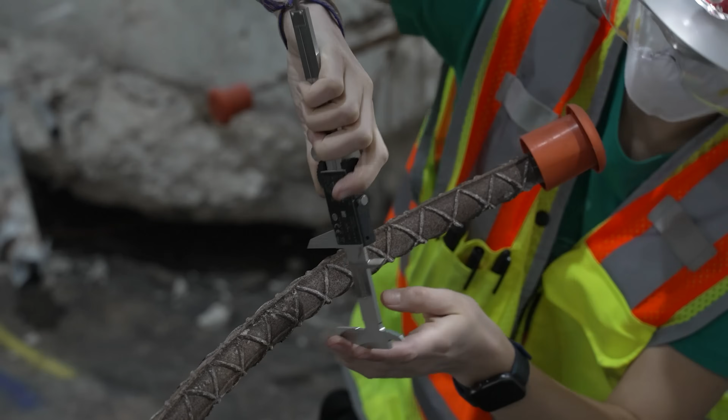My name is Emel Ganapati. I'm an associate professor at the Department of Public Policy and Administration at Florida International University. I will be leading the social science team as part of the investigation. Social science research is going to support the technical investigation, what our engineers and forensic scientists are doing. It's also going to help us understand the context — what happened, what time it happened, who was there, how things changed from the plans — because we're trying to solve a puzzle here, a technical puzzle as to why the building collapsed. Different actors have different knowledge about this building, so they all bring something different to the table and help us understand different aspects of the problem.

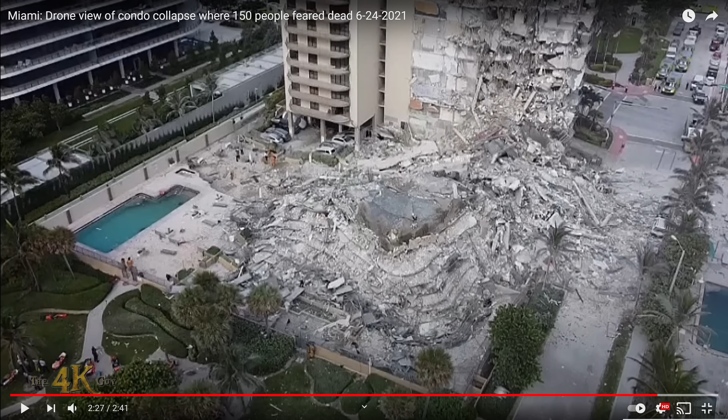In this video, we're going to review the status of the National Construction Safety Team investigation into the partial collapse of the Champlain Towers South condominium in Surfside, Florida. This meeting took place on June 8th and 9th of 2022. So this is typically what the NIST investigation Zoom calls look like — each of the presenters gets up there and talks for a bit.

The investigation is focused on establishing the likely technical cause or causes of the building failure, and recommending as necessary specific improvements to building standards, codes, and practice. Now, typically what they show you on the screen is kind of fuzzy, but I have their original slides here.

What she reiterated for us was that back in July is when they started doing all the tagging and collecting the evidence, and then, as you remember, they cleared off the site. In August, they started doing subsurface investigation and non-destructive testing. Then here are the 6 teams and the 6 projects that they announced, in a slide from back in November actually. And they actually ended their Florida deployment in September, so all of their people, I guess, packed up and left.

Here's that complex slide that they presented at their meeting in November, showing the interaction of all the different projects that they were working on to come up with the final root cause of the condo collapse.

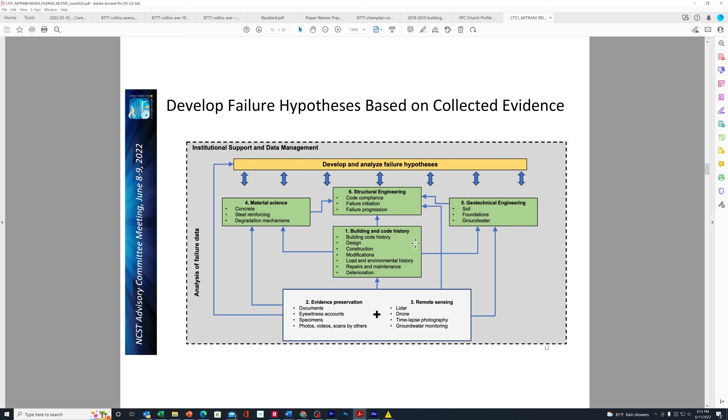Now here's their cooperative timeline that they gave — this was the first time they gave us any kind of dates of when they think stuff is going to happen, along with joint protocol testing they're doing with different people.

And then here's what they showed in January, where it said they named the social science lead and discussed custody of evidence. NIST has since procured at least 2 inside warehouses. Remember, NIST has a statutory obligation under the National Construction Safety Team Act to investigate and to preserve the evidence related to the building failure. So that's why they have a lot of it in this building here.

So these are 2 new pictures here that we hadn't seen before — let's take a closer look. Here's one of at least 2 warehouse bays that they have, and you can see they've saved numerous columns there, all laid out on the floor, and everything's bagged and tagged.

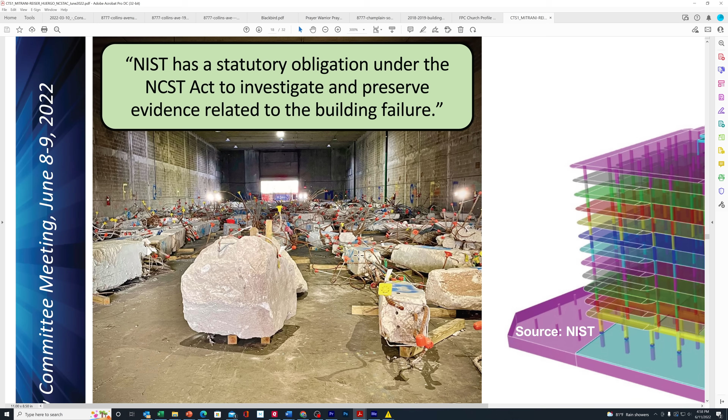And don't forget, they also did all sorts of photographs, 3D digital imaging, LiDAR, and other laser scans of everything before the pieces were removed from the site. So they know exactly where every one of these pieces came from on the rubble pile, and that's very important to maintain a good chain of custody.

So right here is one of the early software models that they created of the Champlain Towers condominium. I've sort of maintained all along that the planters were right here. I have only said it was this column here that probably fell first, the M11.1, because if you remember, the tourist was shooting video across the street.

Here's the ramp, you can barely see it through there, shooting down the ramp, and it was the column there that was missing from her video.

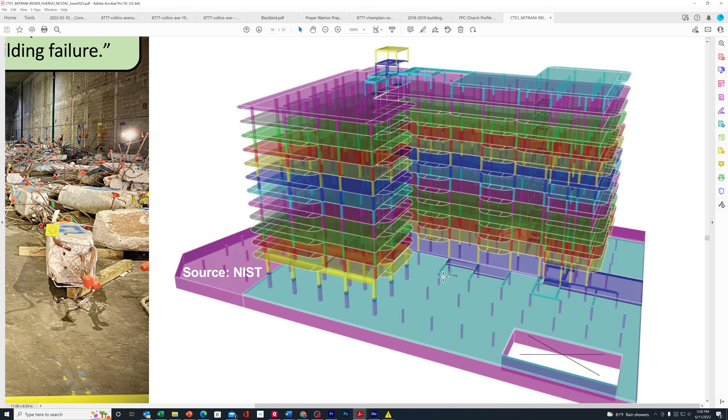Now other evidence has come through from the Miami Herald in the last month or so, where they showed us pictures taken two weeks before the collapse that showed the planter over here severely cracking. And now some people are saying that the column for space number 76 could be a point of interest to look into also.

Then in February they had to do what they call phase 1 protocol warehouse air sampling, and they needed to make sure there wasn't any asbestos in there because the EPA has all these rules and regulations. It came back negative on the asbestos, which is what I would have expected anyway, because they quit using asbestos, I don't know when, maybe in the early 70s, and this building was completed in '81.

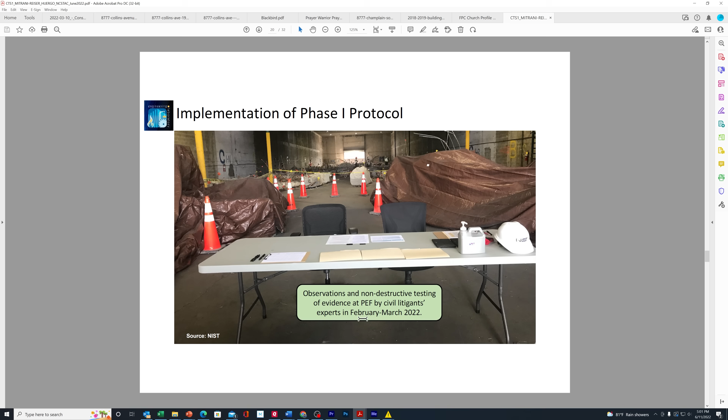And then what you're looking at here is the setup that they had made for all the plaintiffs of the lawsuit. They had petitioned the court, the judge, Michael Hanzman, in the class action lawsuit for the Champlain Towers South plaintiffs, and he granted them access to see this evidence under the custody of NIST. This occurred during February and March.

Okay, and then in March they did warehouse scanning and data integration for 3D. They scanned everything that was in that warehouse. Here it is right here, so let me zoom into these for you.

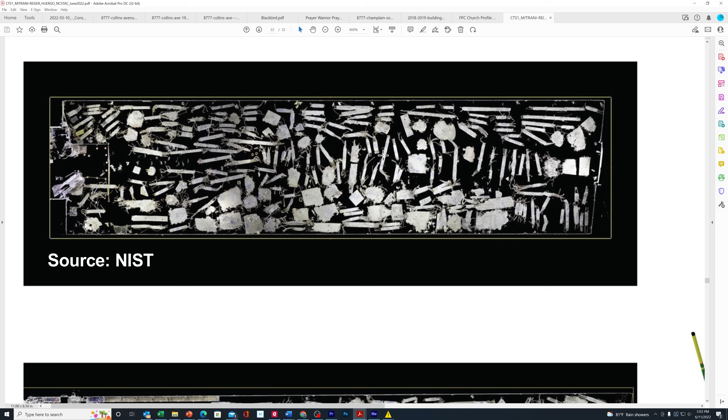So what NIST did was they got these high-resolution 3D photos looking down inside their warehouse. These are all the columns, beams, and slabs, whatever they were able to get there. They've got them all laid out and tagged so any member of the team can zoom in on these pictures when they're not in the facility itself, to get closer looks at all of these columns. So here's both of the different warehouse bays that they had set up, and here's another image they supplied that we had not seen before.

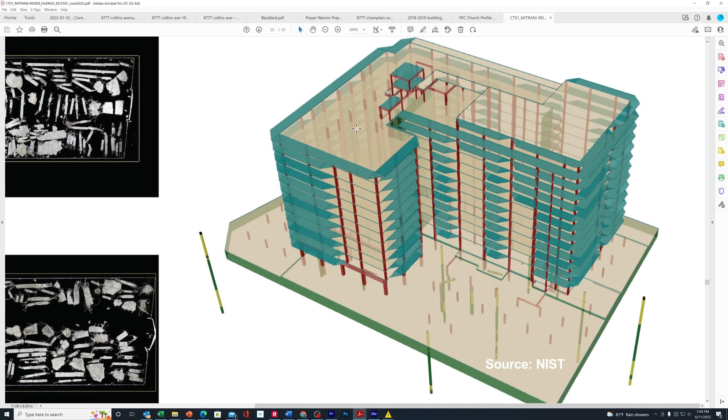So they're really getting more granular here with their software and the modeling of the condominium. See these big, taller green piles here - they've characterized most of the piles down to their depth underneath the building. From what they were describing, they can turn on and off any column they want. They can turn off the whole building and just leave two or three columns up and running so they can examine things with a lot more granularity.

Now they're talking about the corrosion studies and the evidence scanning specimens, showing the different types of failure modes that can happen to cause internal cracking and surface cracking or delamination or spalling. They have this column here lying down, and it looks like that's for parking space number 29.

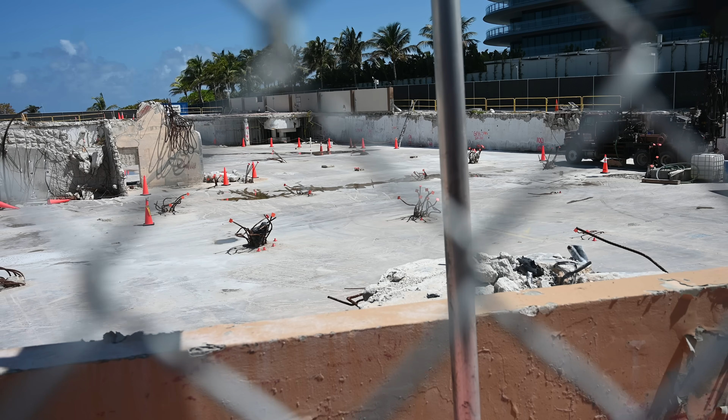So if you look here, for example, at this video that I shot back in March when I went down to the site to capture the status of the site, as you look around on the garage floor there, you can see where every single column had been cut out eventually. And where do they do it? They cut it usually 2, 3, 4 feet above the floor, because they don't want to damage the floor. They've already got enough water intrusion problems there.

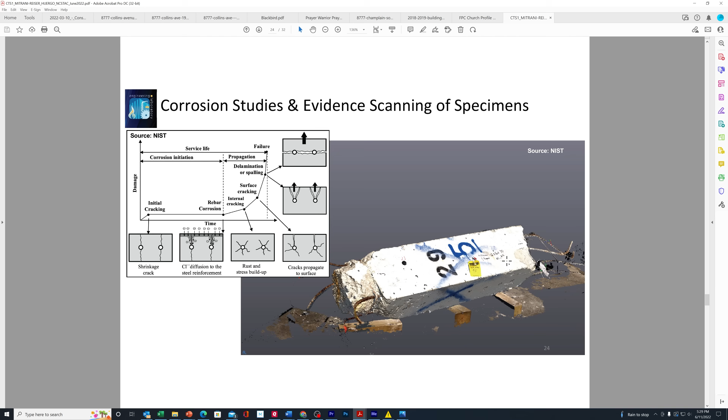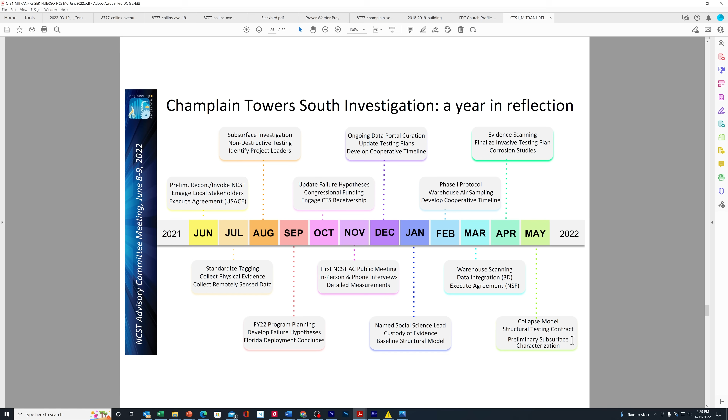So here in May 22, what they were saying is they have the collapse model contract ready, and they were doing some preliminary subsurface characterization. So that says to me they know what was going on beneath the foundation now as of May 2022. So they're also working on developing this first generation of the collapse model, and they're finalizing the structural testing program as well. So they're going to look at the loads in different regions around the slab, around each column here.

And so he was saying here with the hypothesis, it's a constant investigative activity, and it includes the initiation and the progression of the failure here. So what they want to do here is that they must find a single valid hypothesis, and you have to disprove all the others. That's how they're going to arrive at their root cause. And he knows that there's going to be multiple potential causes and contributors.

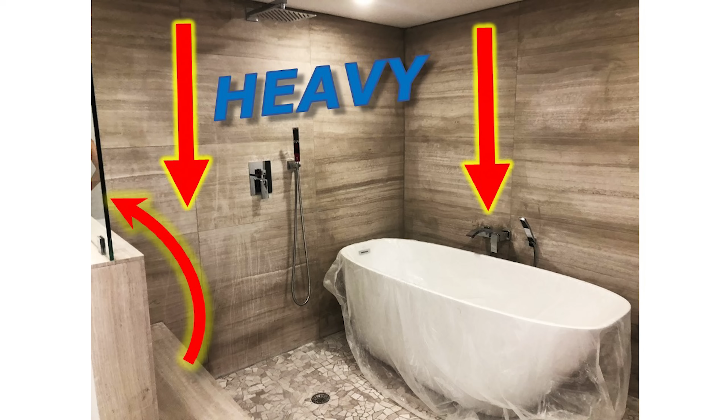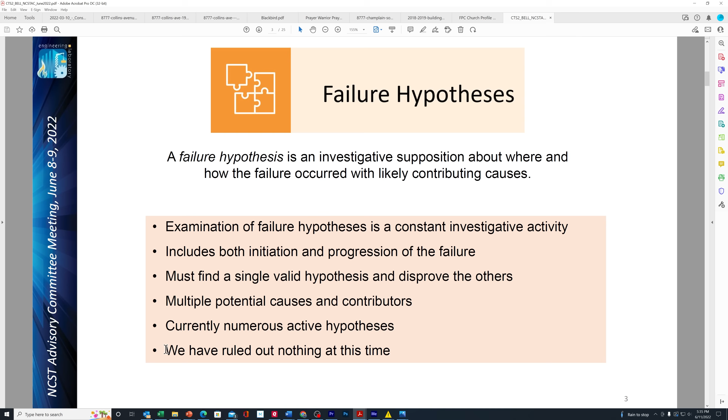So if you remember on my previous video from a couple of weeks ago, I showed you how everybody is remodeling their units over the years, and they've replaced the small mosaic tiles in the bathrooms with big, thick, fancy stone going all the way up the walls, and big, heavy granite countertops. And it's pretty interesting to say that so far they haven't ruled out anything at this time. Now, I've already ruled out a bunch of things myself.

So the way they're going to arrive at their failure hypothesis is they're going to be looking at building strength and building loads, and running these all through their computer simulations and come up with a progressive analysis as to how it progressed. And then they're also going to be looking at the actual collapse evidence analysis. These two will feed together to arrive at the final root cause. That's their methodology. They're also going to build an official collapse sequence, a timeline.

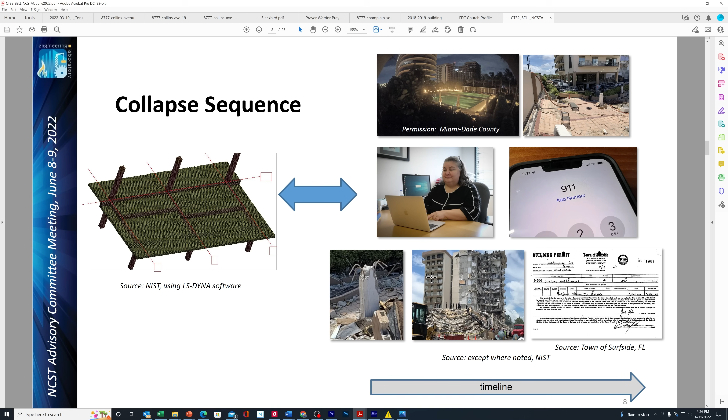The initial pool collapse happened at 1:15 a.m. The tourist took the video at 1:18. Some of the first phone calls into 911 started coming in at 1:17 a.m. Then the building collapsed at 1:22 a.m., and the police arrived at around 1:24 a.m. So these are the timeline things that they're going to look at, and they're also going to go back in history and look at all the building permits.

They've also been training all of their team members in uncertainty quantification. It's sort of like a science where you look at the numbers and the characterization of data that you've collected, and you try to reduce uncertainties. Like, what would the outcome be if you don't know X, Y, or Z? Would that change the outcome?

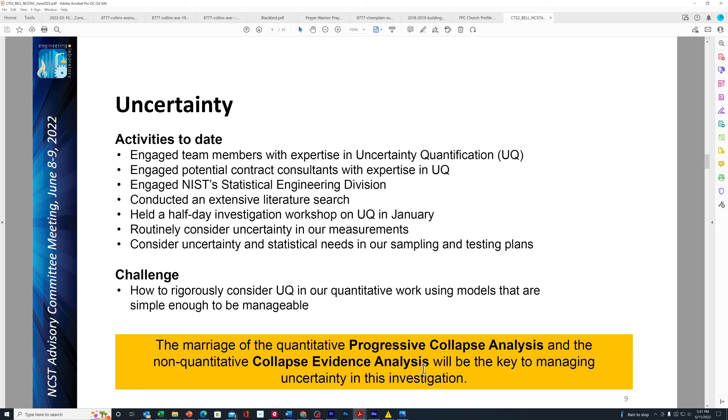It's a type of science they're training all the team members on right now, to be able to draw better conclusions on the root cause of this condo collapse without knowing certain inputs. Here's their bottom line statement, and this might be confusing if you don't understand the whole engineering analysis process. They're marrying the progressive collapse analysis I showed you above with the non-quantitative collapse evidence analysis—stuff they can't put a number on. For example, there was water leaking over here; we don't know how much weight it added, but it was leaking and it did something. So you have to combine those two to reduce that uncertainty.

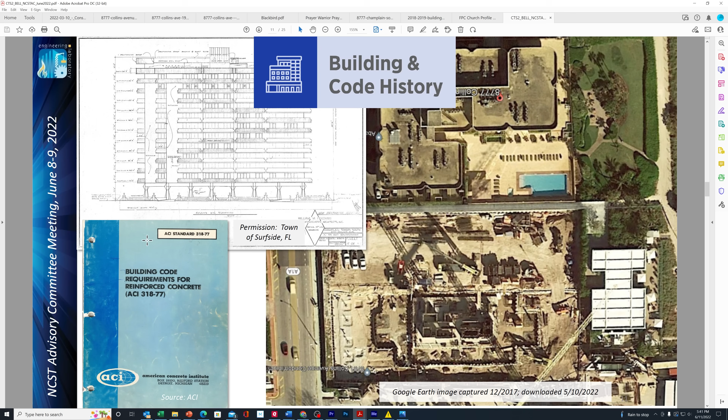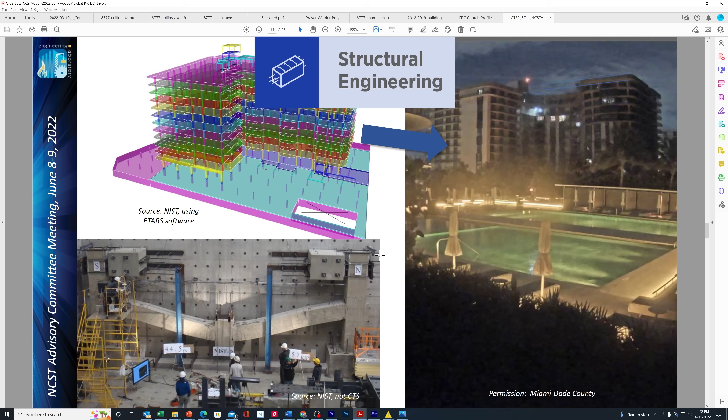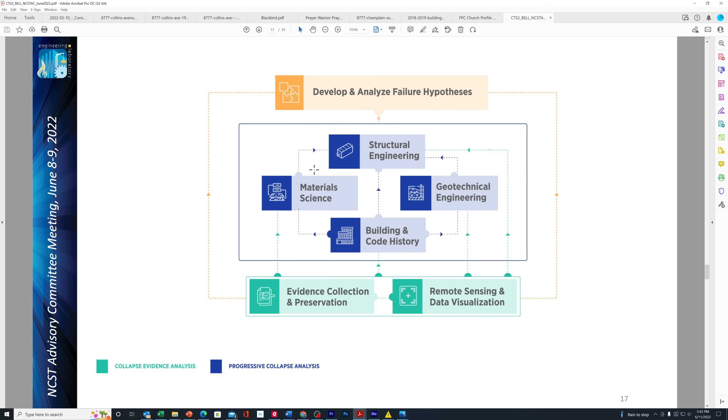They also did the geotechnical engineering—I believe they're still doing some of it on site. They're looking at the structural engineering as well. The social science part is being wrapped into Project 2, under evidence collection and preservation, because that's where they have Emel Ganapati. They're basically showing that they'll take these 6 different projects, blend everything together, and develop and analyze their failure hypothesis.

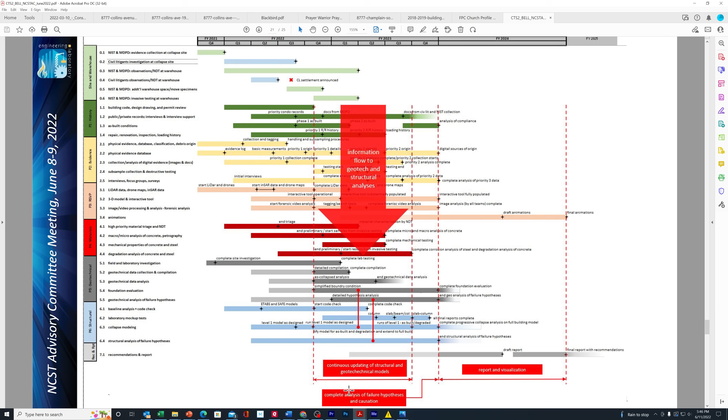So all of this information will flow into the structural analysis. They're going to continuously update the structure and geotechnical models based on the results of all these different tests and projects. This could be a feedback loop where something changes, they update the testing and simulations, more data comes in, and they feed that back in. So it keeps refining itself over time.

Next they talked about the 3D visualization of the evidence. Their goal here is to collect and document everything, and identify the original location of every piece of evidence that they have — where they found it.

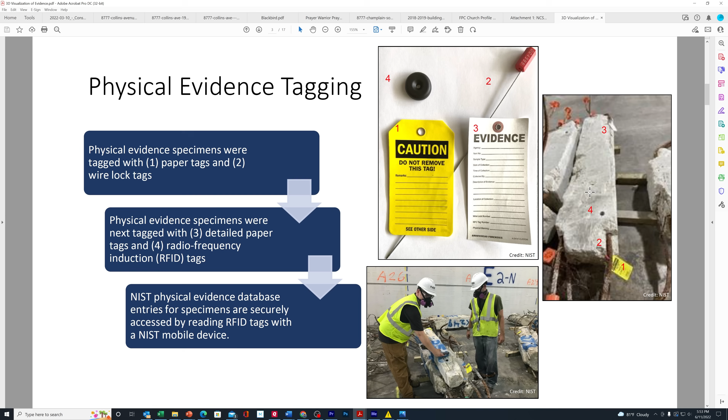So here's all the tags that they're doing — the evidence tags, the caution tags. And if you look over here, you see this little round black thing next to the number 4 — that's an RFID tag. So every single one of these columns and chunks of concrete has an RFID tag on it. This is a new picture — inside their warehouse — and here it looks like they're scanning an RFID chip on one of the columns. So theoretically, they can walk up to any piece of evidence anywhere in these buildings and just scan it with an app on their phone and pull up every piece of information they'd possibly want on this debris.

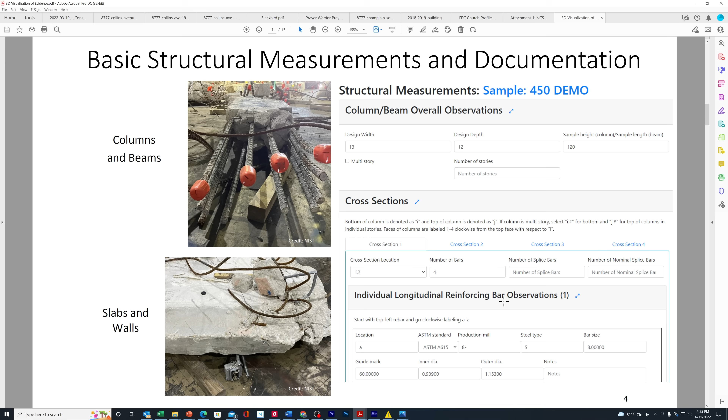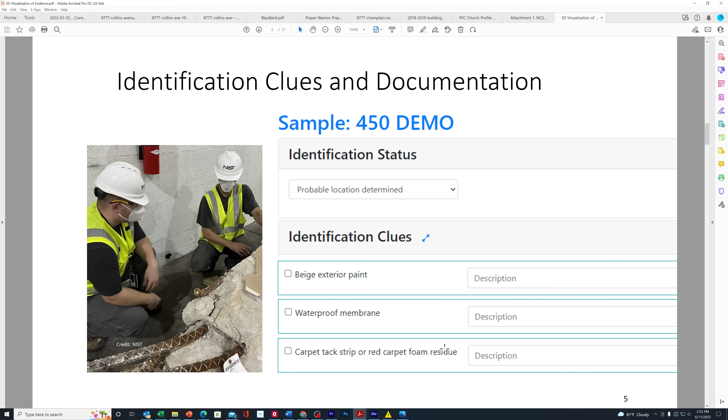That's pretty cool. So here's the information they can enter on each one of these pieces of debris — just everything you can imagine, the longitudinal reinforcing bar observations, the cross sections, everything. They can also give it other identification clues, like, oh, there was beige exterior paint, or this one had some waterproofing membrane on it, and give a description. So this will help them narrow down where this piece of evidence came from.

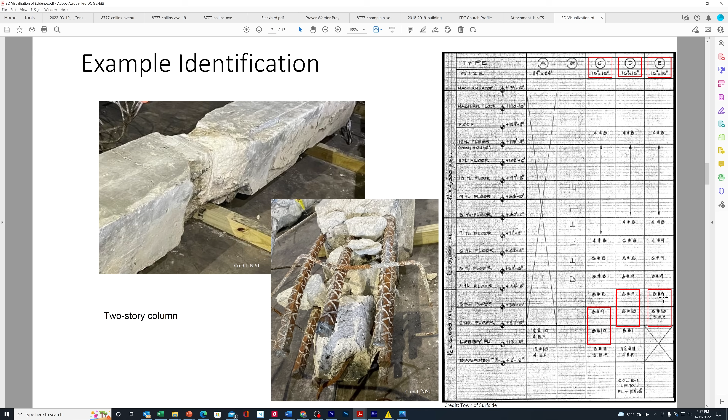They now know that this column, which spans 2 floors, possibly came from the lobby to the 2nd floor, or it was the 2nd to 3rd floor in one spot, or the 2nd floor to the 3rd floor in another spot. So it's a lot easier than you think it would be to narrow down where something came from.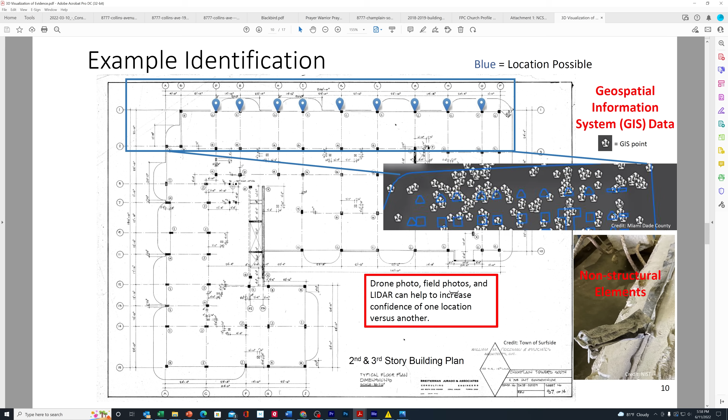They can also use the floor plan to look at all of the possible columns where it could be. See how the blue locations here are possible columns, and the red locations they've looked at and said no, it's definitely not that one. So here they can use drone photos or other photos found in the field, or even the LiDAR, to help give them better confidence.

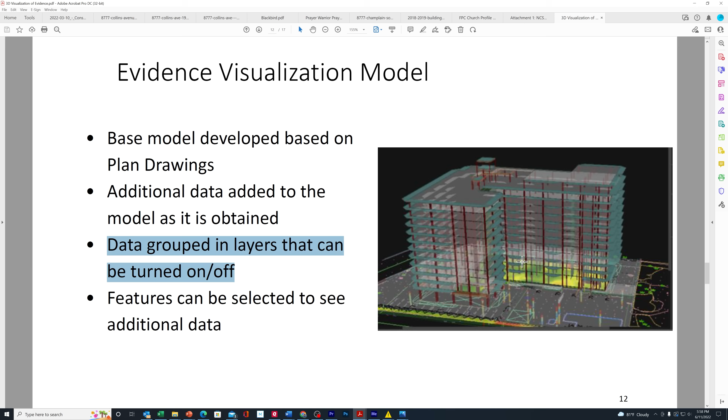Now, one thing interesting here, which I mentioned earlier, is that in their models the data is grouped in layers that can be turned on and off. You can move something out of the way so you can see what's going on behind it simply by turning off different layers.

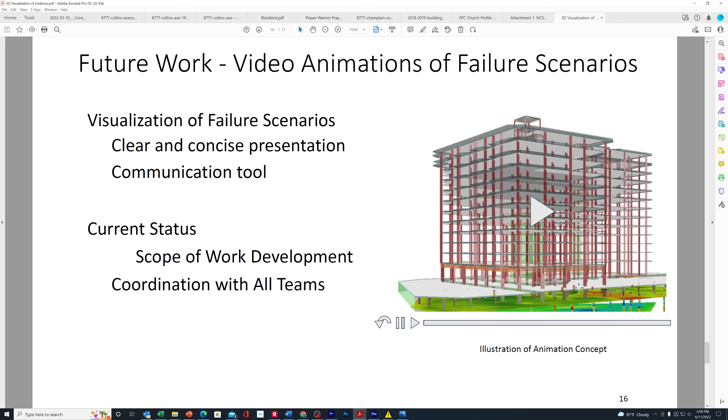Now some of the work they're looking at is coming up with failure scenarios, like what if this column breaks? What would happen? It'll be able to tell them whether the whole building would collapse or not, so they can play what-if games to their heart's content.

Okay, so next they talked about the social science and the additional evidence. This is where that new group comes into play. They're going to be looking at interactions across 40 years, from back when the building was first built, through the design, construction, maintenance, the failure, the response, and the recovery.

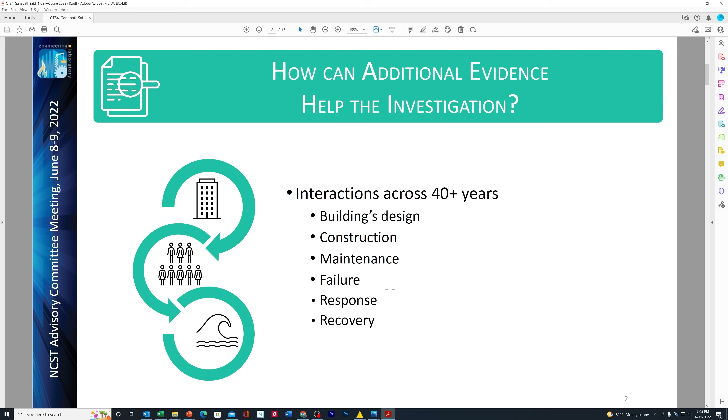As part of the social science, they're going to be doing interviews, focus groups, surveys, and field notes. They'll be looking through all sorts of material, including newspaper articles, social media posts, audio recordings, and body camera footage.

Remember that video we did on when the police arrived? They're going to be looking at everything — the drawings, the building codes, you name it, they're going to be looking at it.

And then this term here, remotely sensed — this means a way of collecting data without touching something. For example, they took a video of something, or a picture, or LiDAR; you're not actually touching the item. So it's important to denote whether data is remotely sensed or not.

So having the social science, I think, helps with public opinion — that's one of the biggest benefits right there. And the same thing with building safety perception. There's a lot of people around the country wondering, hey, is my building next? How do I know if my building's safe? I live in a high rise. Those are the questions I get all the time.

And here, this is what I brought up in my last video — changes made to the building over time. That includes the extra pavers and sand they added to the pool deck, the palm trees they added to the pool deck, and the extra planters they added to the pool deck.

They also have to ensure accuracy of the information they're collecting, so they use techniques that increase correct information retrieval, like cognitive interviewing. They'll use maps, plans, and photos — all of that ties into making sure that everything somebody tells you lines up.

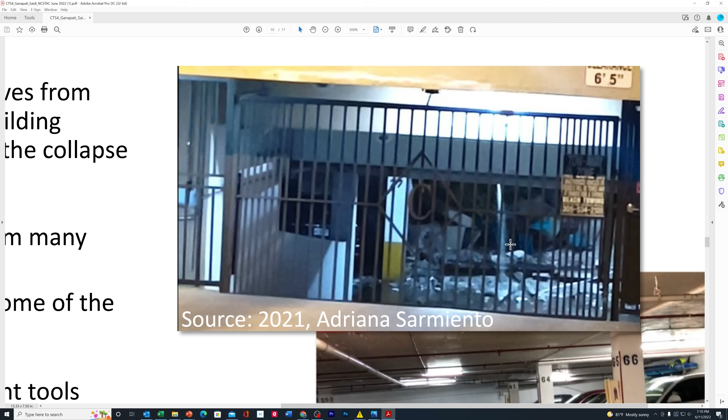Take a look at this. They have greatly enhanced, I believe, both of these pictures, but much more so. Look at this, they took that cell phone video that Adriana shot and really went to town with it. Now, I've spent hours doing Photoshop on it, on the screenshot. I've even had other Photoshop experts send me much improved versions, but this one is the best one I've seen yet.

It's so super clear. So right here, as you look down the garage ramp, of course, you can see the 27 on the column there. And this is funny, so they made the C come out nice and clear. That's for Champlain Towers, it's on the gate.

So many people have commented, they tried to say that these were the laundry machines that fell down from the laundry room above, and everybody was previously pointing to the C because it wasn't this clear. They thought this was like the window on the front of the washing machine.

But anyway, when I look here, here's where they really bring things into clarity for me. You see all of this kind of bluish green stuff right here? And I think that's the planter as well. I think this is all from Sarah Neer's condo, unit number 111, out on that famous 11 stack out on the pool deck. Let's take a look at it.

As I look at one of the MLS photos that we've been showing you, because we used to show this picture last year, because see, this is where they did the digging. M11.1 is right here, and they dug up the pool deck right there and left it dangerously exposed for months before people started complaining.

Here's 111, that's Sarah Neer's unit right here. That's her patio deck, and look at the color of this furniture there. See that kind of bluish green? Doesn't that look like that same bluish green right here?

That's what I think, and this white right here could be her table, that round white table out on her deck. So I'm pretty convinced that when Adriana shot down the ramp into the garage, the pool deck had already collapsed, and that's Sarah Neer's patio that's collapsed right there in the background.

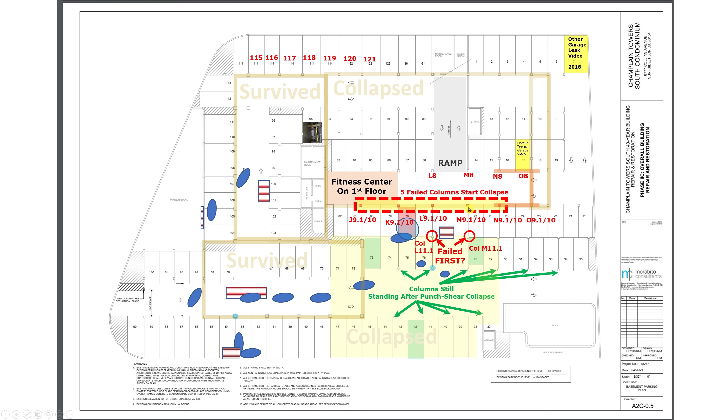So that's why all along one of my hypothesis was that if this M11.1 collapsed right here and it took that beam with it, it would then pull on the column which is right here on the south wall of the building, which is column M9.1, M10. See, here's 11.1 right here, so if it pulls on the beam that was right here, it will take M9.1 with it.

So they're also going to be collecting data from the drones and stuff like that. So that's what these are here, these are photos we haven't seen before either. I don't think we've seen any of these vantage points.

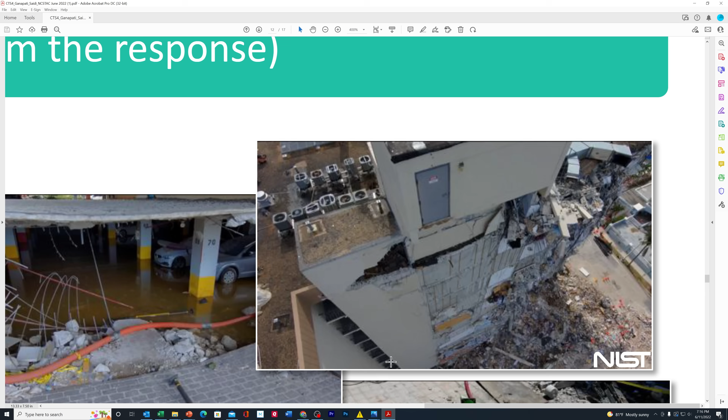And here's an interesting drone view looking straight down the shear wall. This is the part of the building that survived, because of this large shear wall here being nice and solid, and all of those beams they had on the second floor. That's likely what saved this part of the building from collapsing. So then they have other drone videos of a lot of the columns that punched through the deck right here.

And now here's another great one. Let me show you this here, what they did. So they took that video. Remember, we've all seen that now famous video that went around the world of the building actually collapsing, but we didn't see it with this amount of clarity.

What they did, of course, NIST has access directly to the file. What you and I were looking at for all these months was somebody's cell phone video off of a screen showing the collapse. Here you can see how crystal clear, relatively speaking, compared to the video we all have. And then they sent a team of people over to the actual camera at 87 Park at the condo next door, and they did calibrations on it.

So they did these different cards to test and calibrate the camera. I'm sure they likely did white balance cards and grayscale palette cards as well.

So it says here, commercial and home security camera videos. They didn't mention Champlain Towers South video cameras. What about all of the cameras around there? And I keep pounding the tables about this. Where are the videos? They gotta have it. Somebody's gotta have it. They're sidestepping this one. They're dancing around this one because they haven't said we don't have the video, and they haven't said that we do have the video. So they're not telling us anything. They're concentrating on showing us this, but they're not saying anything. They're being mum on it, and I don't like that.

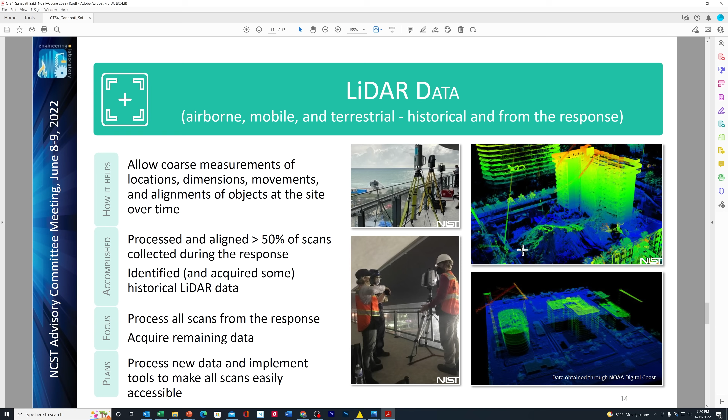And they've processed and aligned about 50% of the scans so far. They're going way crazy on this. They're also using some of the INSAR data from the satellites, so it'll give us any kind of movement insights, like what was going on the ground over time.

And here's more of the 3D scans. Remember I showed you these two pictures before of the bird's eye view of the two storage bays showing all of the columns in there, and of course pictures and cross sections of the different columns. For example, here's some of the rebar you see on there.

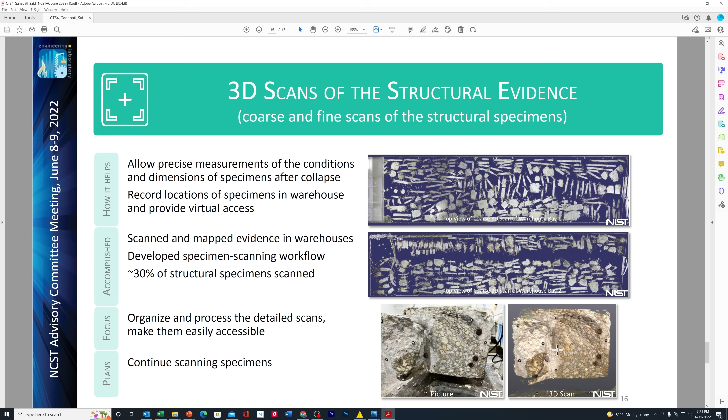And they're going to be looking at this rebar, like, are these two rebar rods too close together? If they are, you can't get the concrete to pour correctly between them, because look how big the aggregate is in the concrete. Okay, so next they talked about non-destructive testing of the evidence.

This is where they go over to the site and they do things where they're not drilling into the concrete or anything like that. So here they are doing the non-invasive testing. They actually started doing this back in August. See here, so they do not alter or damage or destroy the site or anything. So with the non-destructive testing, it's collect the data, do your analysis, provide the insight. Very simple. And so, for example, here, they can also do it on the column.

So here's a column that spanned across 2 floors, and here's where it ripped with the punching shear. And this is typically what you're left with, the textbook kind of mushroom shape cutout there. And so they can start analyzing those to see what was going on. And I think that's sort of what he was doing here, too. This is one of the older photos that they gave us last July.

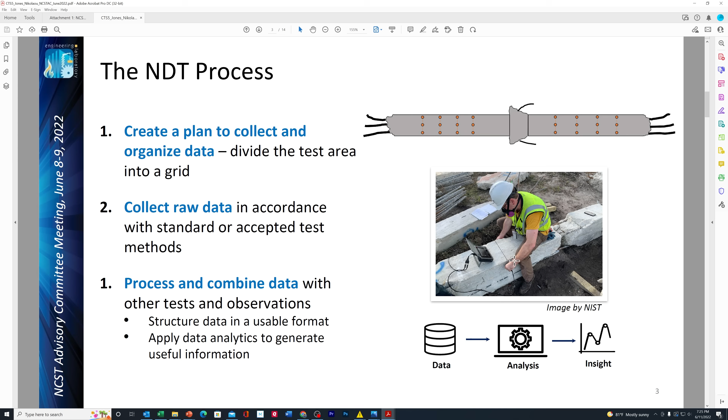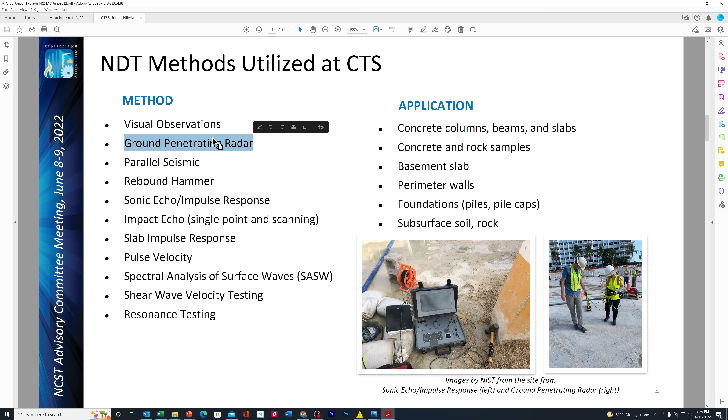Yeah, so they use the GPR, ground penetrating radar. And they do this a lot, too. They use the ground penetrating radar whenever they're going to take a core sample out of concrete, because you want to use that radar to make sure you're not going to drill through a rebar. You only want to be sampling the concrete at that point. So that comes later in the destructive testing. And see over here on this lower left, you can see they were doing a manual measurement of the slab thickness.

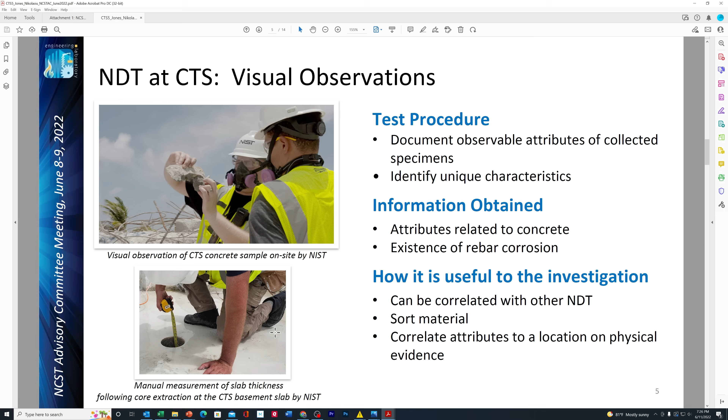So they have to cut a core out of it, and then they measure it. Just because it was 12 inches in one area, it doesn't mean it's going to be 12 inches in another spot. So they have to check in several locations.

This test, the contact pulse velocity, they use to help measure the speed of sound going through the concrete. They'll put detectors on there and send a pulse and measure the time it took to get to the receiver end on the other side. That helps indicate the presence of damage in the material. It gives them a good idea of the quality of material, because they have references. They know what a good column, a 16 by 16 inch column, should give when you run a certain sound through it in your test. And if it doesn't come out like that, then something is wrong.

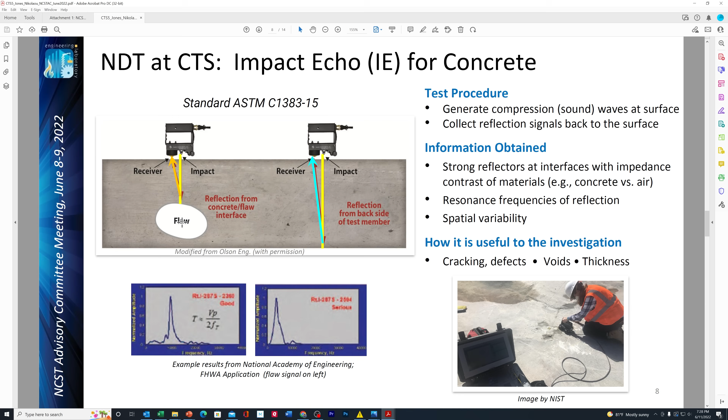Then they were showing how they were doing impact echo. So they put a machine down on the ground, and there's the guy using it right there. They send sound waves down below, and if it hits a flaw, when it bounces back, they'll know it. They'll get the reflection back from the flaw.

They also use spectral analysis of surface waves, and there's their testing equipment. You see the guy using it here on the right-hand side.

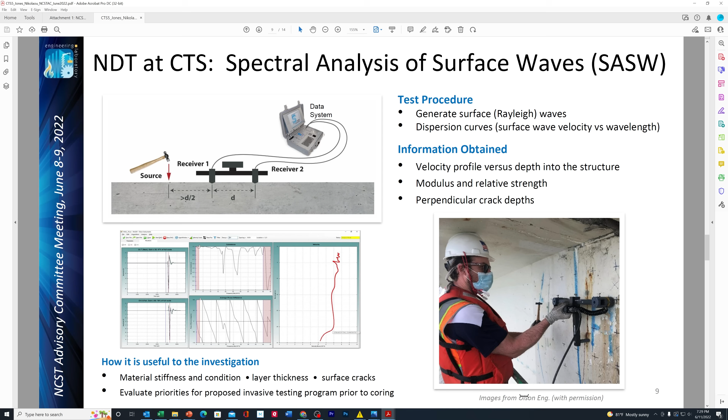I'm willing to bet this is done through a contract, because all of these images here are from Olson Engineering. I'm willing to bet they're the ones that are going to be doing all of that testing. I imagine they're the ones going to be doing all of that testing.

If you look at the number of tests to date, they've taken 1,800 data points on 39 columns and 19 slab pieces of evidence. And then on-site, they did 45 locations to evaluate the below-grade foundation.

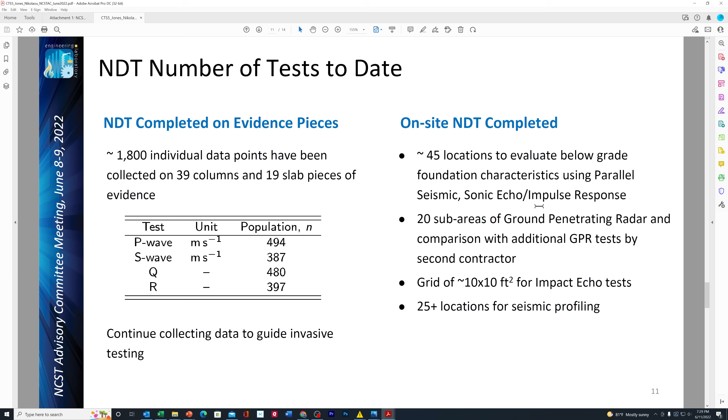All of the non-destructive testing they've done so far affects all of these other guys, the material science, geotechnical, the structural. So the next thing they want to do is evaluate the as-built conditions of the building. They want to look at the geometry, the features, any kind of damage or voids. That's what they're looking for.

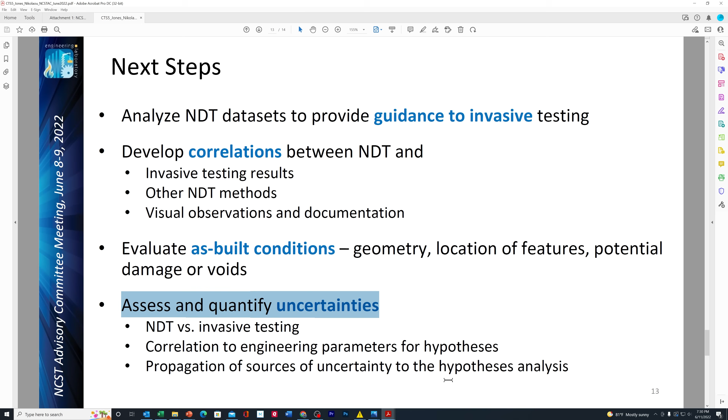They want to see if any of the material they've collected so far shows any evidence of voids or things like that. And remember what I mentioned earlier, assess and quantify uncertainties as the propagation of source of uncertainty to the hypothesis analysis. Of all of the items they don't know, how is that going to affect the outcome?

So next, they covered the invasive testing of the evidence. This is where you start getting old school on it. You start drilling. So here they showed us some new pictures that we hadn't seen before.

Now here's, for example, a core test. These are not really all that new. You've seen us show you that they had done some core test sampling on the site before it collapsed. We've shown you that in some of our videos in the past. In fact, earlier in this video, I showed you that cutout they made on the pool deck right outside Sarah Nair's condo unit. That's where they did one of those core tests.

They'll also start looking at some of the rebar rods here. They're going to start to extract them and cut them open and look at them, send them off to metallurgy experts to see if there was something wrong with the manufacturing of them.

Here's the laboratory testing. Now here you're looking at the compressive testing of the core sample. So what they'll do, as you can see in this picture above, is cut out the core sample, put it in the machine, and it will come down and squeeze it until the concrete explodes, just like I showed you earlier.

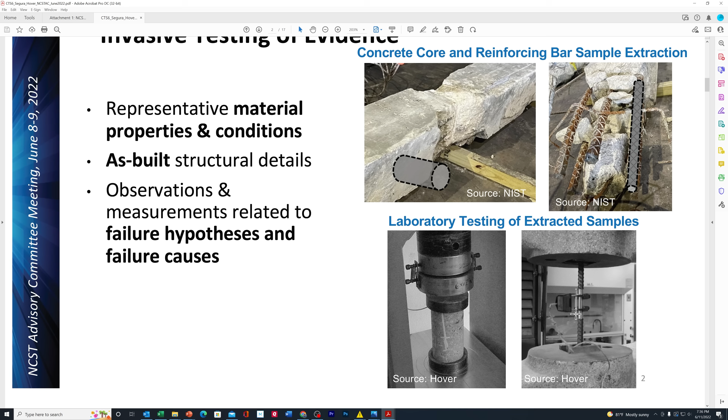And then this one here is the tensile test on the rebar. So they put it on this machine, and the upper section and the lower section start to pull apart until this whole thing just breaks. So that's what they want to do. They want to quantify at what point do they hit failure.

And they do have a prioritized plan. I think this means they're only going to take cores when they need something, if it's on a specific location.

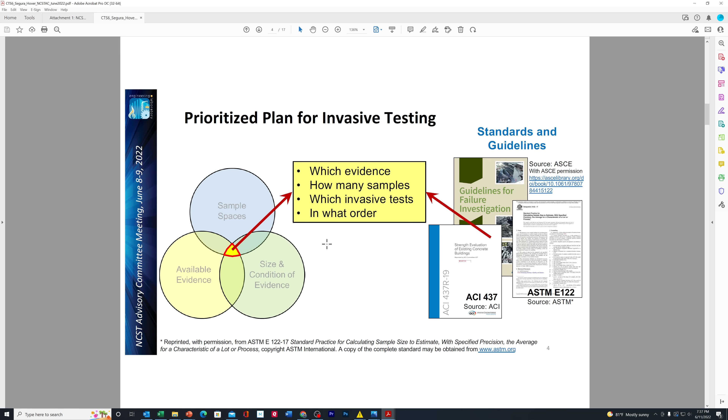There's all sorts of standards and guidelines for doing failure analysis and investigation, so they're going to be using those standards. It's not just haphazard - you don't just drill in, grab a core, and start doing stuff. There's certain testing procedures that you have to follow when you do this.

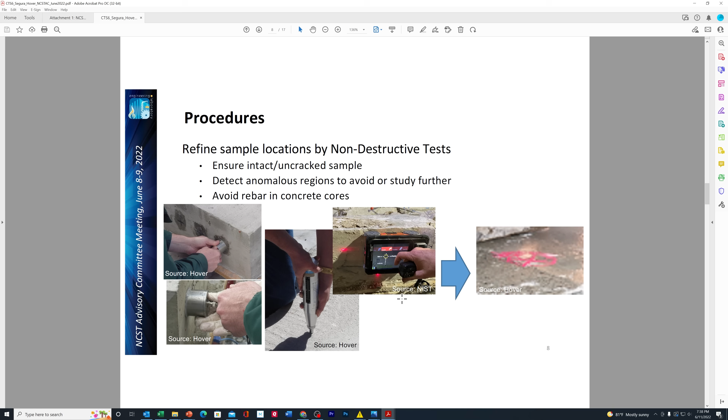Here's what I mentioned earlier about the ground penetrating radar and stuff like that. So they want to refine the sample locations that they got from the non-destructive test, so they know where to drill so they can avoid rebar in the concrete cores.

So these pictures here show how they accomplish it. They come in with these big old hole saws, and of course they have to do it while it's wet. They come in and do this wet drilling, and pull out the core sample, and there it is. There's all the aggregate that's in the concrete, and they're going to investigate and look at all that and say, hey, is the aggregate properly sized? Is there enough aggregate in this concrete? They're going to inspect all of the samples here to verify the viability, and they're going to look for internal cracks or voids in these cores.

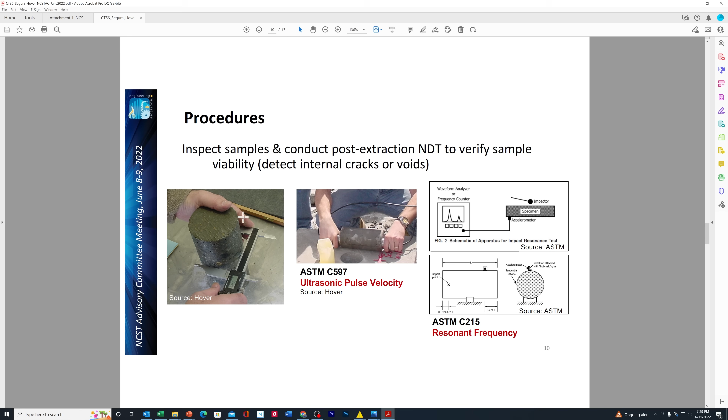Now here I see the guy handling it with his hand. I don't think this is necessarily from Champlain Towers - these pictures are from Hover, who is the company probably going to be doing the testing. So these are probably just regular samples of concrete they were working with. So don't panic when you see these pictures.

So here's all of those physical tests I was telling you about - 4 different tests here. The first one is compression strength, where the machine pushes in on the middle. Then you have splitting tensile strength, where it pushes in on the middle of something round like the core and waits for it to crack like that, and it'll split into half. Then, of course, you have the rebar strength and ductility, and then you've got modulus of elasticity, where they compress down on something to see if it bounces back into its original shape.

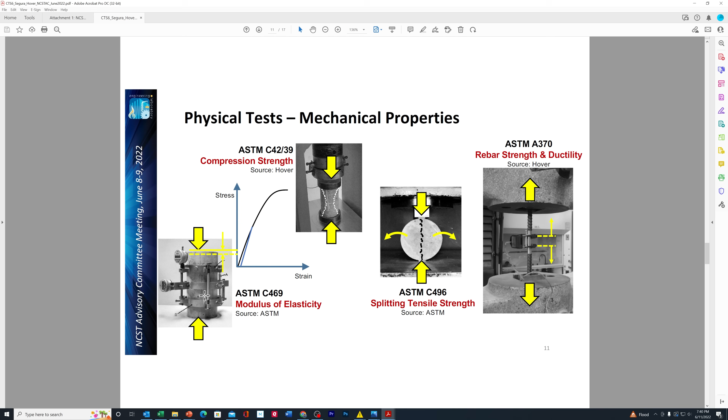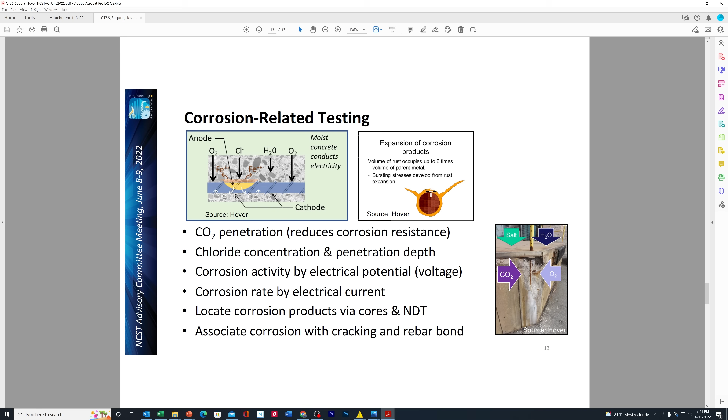They're going to be doing all sorts of chemical tests on the aggregates, the paste, the mortar, everything. They're going to be looking at the corrosion - for example, this red circle here, here's the rebar. They're going to be looking at how that rebar gets rusty and expands its diameter and then causes the concrete to crack. They're going to be hitting this concrete up with all sorts of salt and water, pure oxygen, carbon dioxide, and doing corrosion testing on the rebar rods. They want to know the potential of this uncoated steel.

Remember, when this building was built, they didn't use anything like epoxy dipped rebar, which a lot of buildings use today. They just threw the rebar in there and forgot about it.

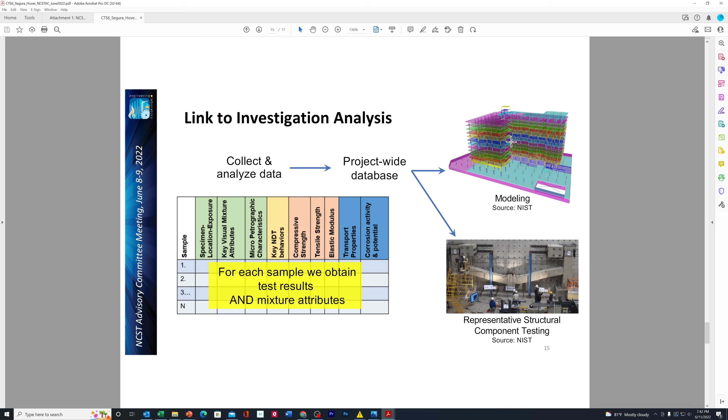So, of course, all of the core samples they take will feed back into the analysis and the modeling, because they'll take core samples from all over the property and feed the good, the bad, and the ugly into these collapse simulations. They'll be able to much more accurately come up with a collapse scenario for us. Even though we've seen good jobs by guys like Mike Bell - you've probably seen some of his collapse videos - remember, we're all just guessing on the outside, but these guys are taking real data from the real concrete and making real modeling decisions from that.

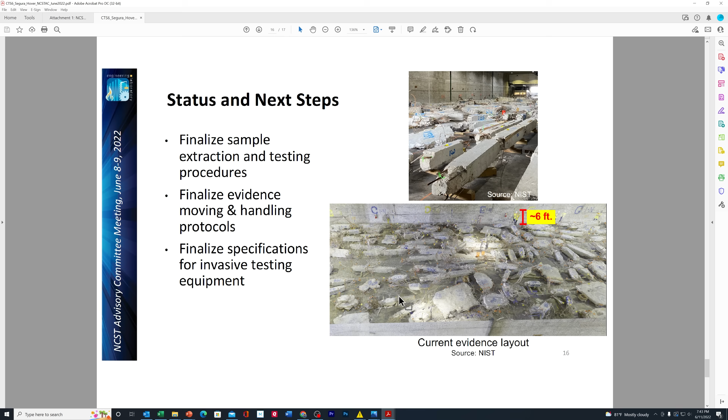By the way, they're still working on moving some of the evidence around and finalizing the specs for the invasive testing equipment. Here's a couple of good shots showing what's going on inside that warehouse where they've got the stuff stored. They left a little measurement here, a 6 foot legend. There's, I think, 2 NIST employees right there, showing you how big they are compared to the whole massive pile in there. And here's another view looking down inside the warehouse.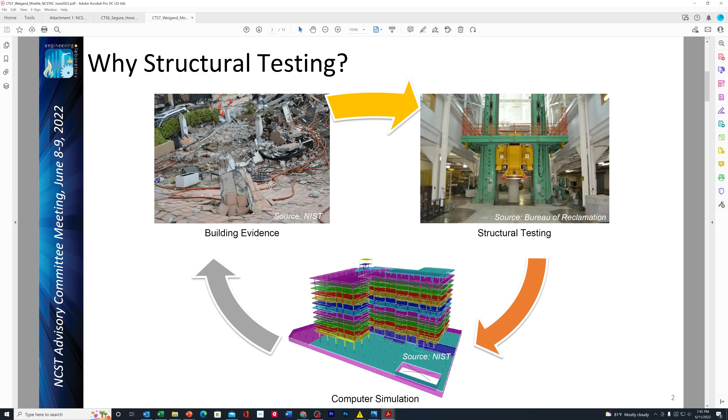In this NIST update on the condo collapse investigation, they talked about this other project they're doing - the structural testing. They're going to take the structural testing that they do, feed that into their computer simulations, and also deal with the building evidence. Hopefully by the time they're done, it'll give them a much more accurate simulation model. And of course, they'll look at the historical record.

Hey, look at this, folks. They must have seen my video, because look at this. They're talking about the real estate listings and the showings and the pictures that Fiorella sent me that show some of the remodeling that was done in the bathrooms.

I had mentioned this on our last video, and a lot of people were skeptical of me, that this wasn't a stressor. A number of people accused me of being a sensationalist, just trying to do clickbait, when in reality these are not unfounded fears.

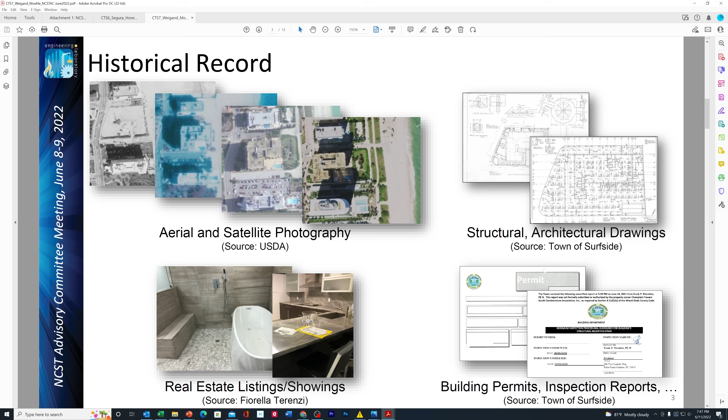I'm going to do a second video that talks about my analysis of the weight difference, how much weight is different here than what it was in 1977 when they built it. All you naysayers out there, you've never had to carry a 50-pound bag of concrete. You've never had to carry up all of the tile backer boards, or cases of 12 by 24-inch tile that's 3/8 or a half-inch thick travertine. You haven't had to deal with all that nonsense.

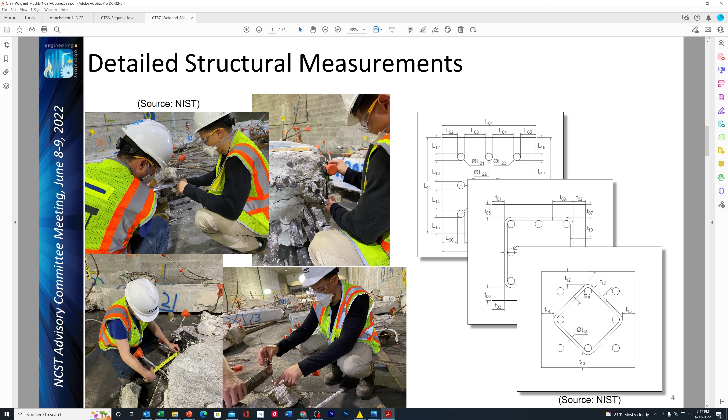So they're going to look at detailed structural measurements. Here's some good shots inside the warehouse. What they're doing is taking very accurate measurements of all the rebar rods and mapping it out, checking if everything is where it belongs. Is the right amount of rebar in there? Are they the right distance apart?

These are the standards they live by. There's a lot of conspiracy theory people bad-mouthing and trashing NIST, saying these guys don't know what they're doing. It's usually the people that don't understand the science behind something who don't know what they're talking about, and they're talking about it from a standpoint of ignorance.

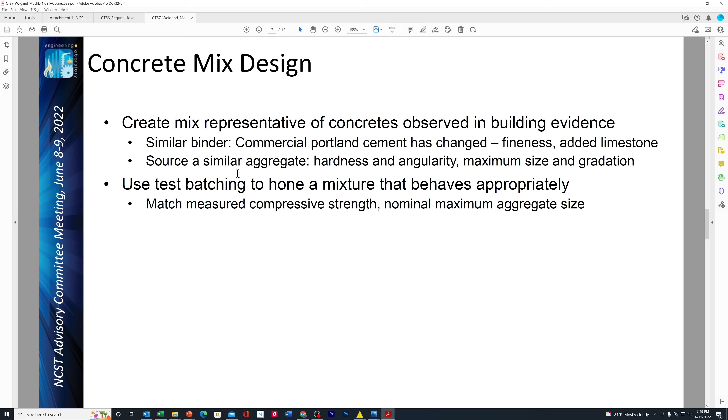We did testing like this many years ago when I was at Motorola as well. We would drop test and do compression strength testing on our displays and our radios. They're going to look at the concrete mix, check out the binders and everything. They have engineers and scientists who are the best of the best in their fields, looking at this thing from a million different angles.

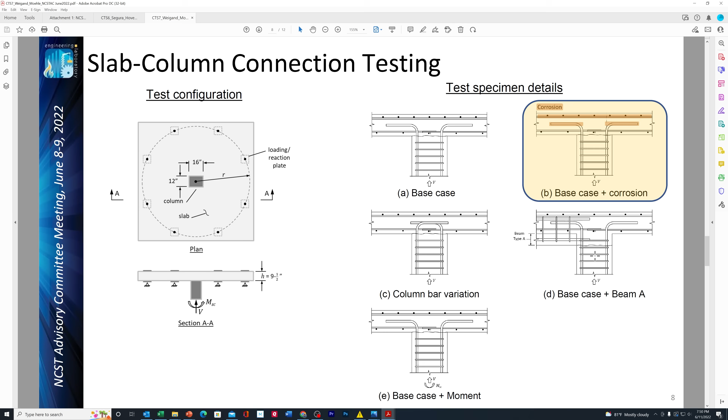Here's more of that slab column testing we were talking about. Here's your column, and if you look at these three pictures in the middle, you have the column, then the slab here, the floor slab, and the rebars that curve up and go into there, all poured as one. They want to examine that and see if there's any corrosion showing up in the middle, and they're looking at the case where the columns intersect with the beams as well.

Yeah, they're going to be looking at the moment forces on these as well. They're doing accelerated corrosion testing.

We used to do this when I was at Motorola too. We called it ALT, Accelerated Life Testing. We would take radios and run them through temperature and humidity cycles of minus 40 degrees Celsius up to 100 degrees Celsius and back and forth for like a week, trying to accelerate the life of it and inject dust and stuff like that in there.

This is what everybody's been talking a lot about ever since day one of the collapse. They're referring to this area right here where I pointed at the very beginning, the five columns that fell. They're on the exterior wall of the building, and they sit on top of this beam. So what you have here is the pool is this way, the lobby's this way.

The pool sat on this 9.5-inch deck right here, and then all of a sudden you get to this floor concrete, you get this step up here, and everybody was analyzing these step-ups and what could have gone wrong. Could there have been shearing forces? What's going on here? So they're doing all sorts of testing on this as well, the slab beam column connection. That's such an important thing. This is why we had punching shear.

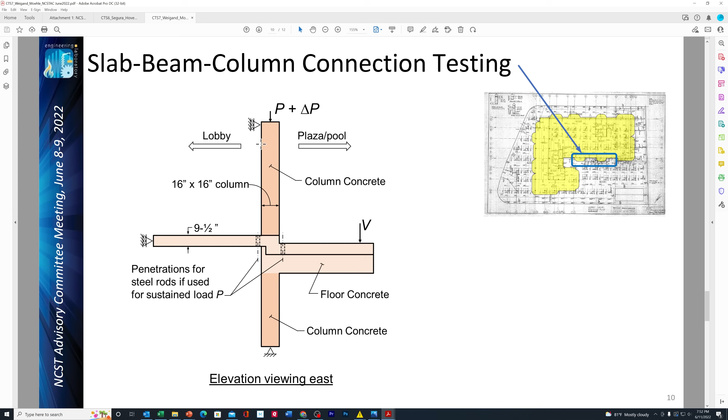It may not have happened in this spot, right at the edge of the building, but if you look out over in the pool deck, it certainly happened out there.

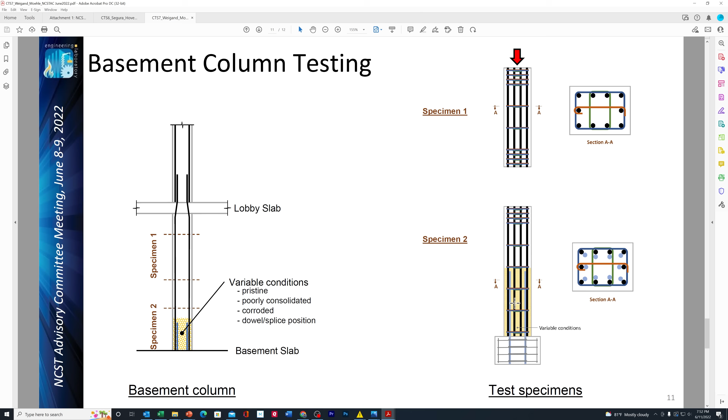That's why they want to know what happened with all of these slab beam connections. And then they did basement column testing as well. They come down to the basement slab, which is the garage floor, and they want to look at some of these dowels here. They want to know where was the splicing and the position of them, and were they the correct length of overlap. They're going to look at a whole bunch of different things here, taking test specimens, doing cross sections, and taking measurements as to where all of these rebars were in the column, and are they spaced correctly.

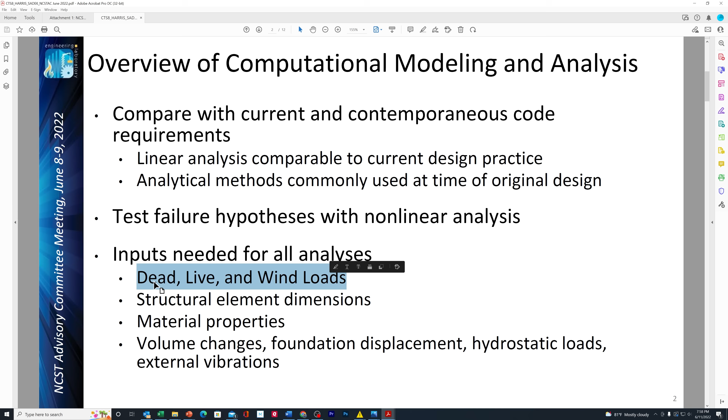The next project they talked about was the computational modeling and analysis. So they start looking at dead, live, and wind loads. For example, the dead load would be all of that stuff they added in the bathrooms when they did the remodeling, and all of those illegal tiles that many units inside Champlain Towers South had out on their patios. And here, for the first time, this looks like one of the first close-ups we've seen yet of one of the pool pavers, the big square one here.

They're going to look at significant wind events, like the small hurricane that came through in 2017, Hurricane Wilma in 2005, Hurricane Andrew in 1992, and a few others in between. So they're going to look at the historical records of loads on the pool deck.

See, that was another one. Remember I kept telling you guys, here's that picture from Google Street View probably, from before 2017 when they removed these palm trees. But these palm trees were added in 1996 along with these new planters holding them. So that added a significant amount of weight onto the pool deck, along with all of these pool tiles here.

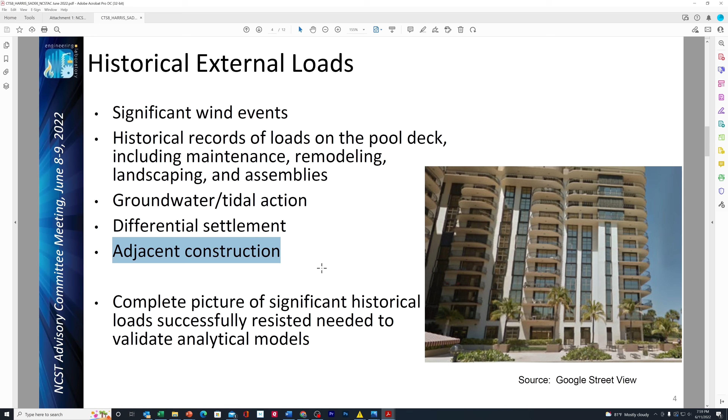Adjacent construction, that's their way of saying they're going to be looking into 87 Park. That's the condo next door that was part of that big lawsuit that just got settled a couple of weeks ago for over $1.1 billion.

So if you look over here on the structural design, they want to figure out the degree to which the building, the way it was designed, satisfied the building codes and other standards of practice at the time. There's certain things that are not allowed today that would have been perfectly fine back then. They're going to evaluate all of that against the current codes and current standards of practice in the industry.

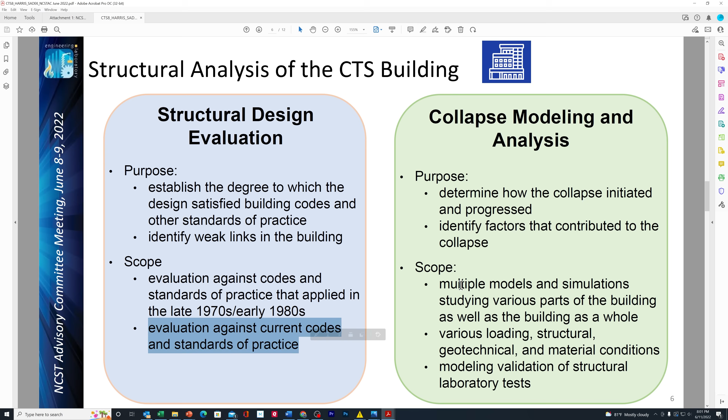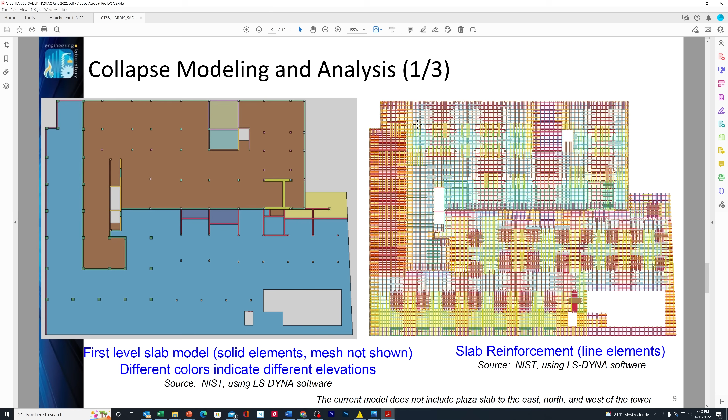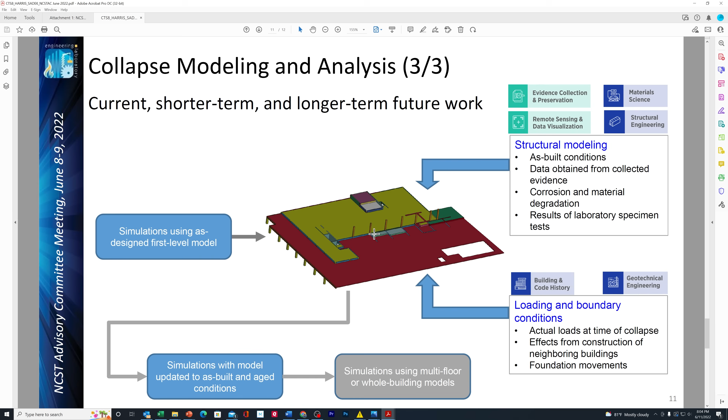And then they're building a grid here. This is a drawing showing all of the slab reinforcement, all of the rebars around each of the columns. We know what it says in the drawing on the floor plan, but now they're going to make sure each one of these connections actually had those rebars there, and whether they were the correct ones too. They'll feed all of that back into the modeling software, and it will determine whether or not this building was structurally safe. So basically they're taking all of the information they've collected and feeding it back into the simulation software.